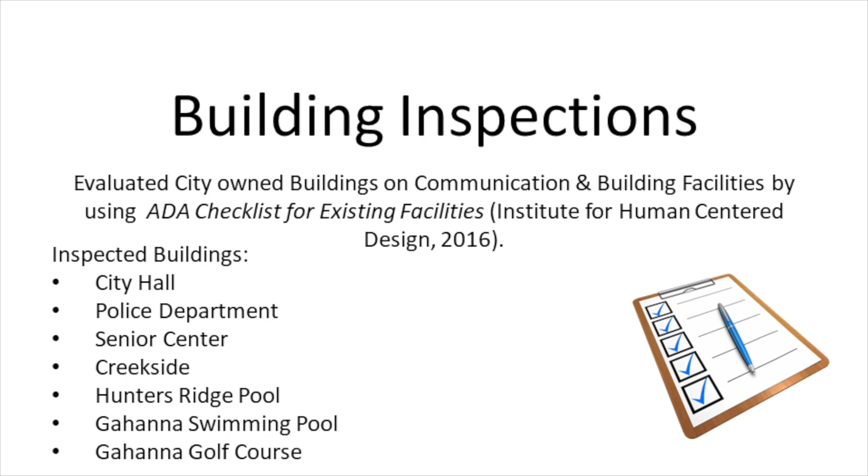In terms of communication issues, the most common things we discovered were either non-compliant sign heights on ADA parking spaces, or just the lack of signs at accessible entrances to buildings. We also noted that some signs within the facilities did not have braille.

The building inspections uncovered common issues, including inaccessible doorways and non-compliant restrooms—those with stall sizes or door locks that are inaccessible—and also non-compliant sinks, situations where an individual with a wheelchair may not be able to wheel up right next to the sink or air dryer. All of these issues within the buildings were documented and included in the ADA transition plan.

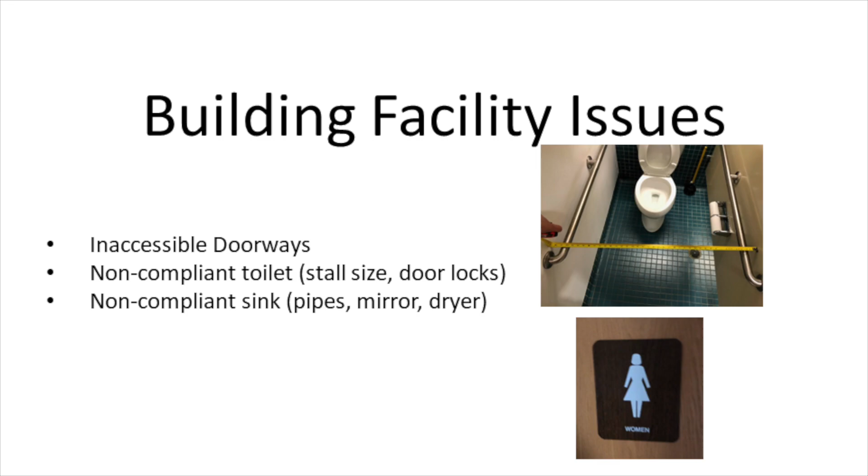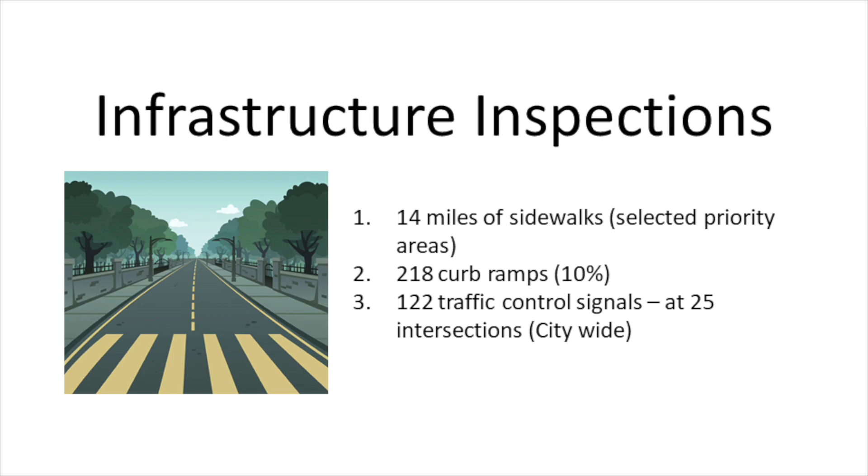Infrastructure inspections included 14 miles of sidewalks, 218 curb ramps, and 122 traffic control signals throughout the city.

Sidewalk inspections revealed several sections of sidewalk with settled panels, and ones with raised lips where tree roots have caused them to rise up from adjacent panels. Some sidewalks didn't have sufficient passing space. All these items were documented, and cost estimates were prepared to remedy these issues and included in the implementation plan of the ADA transition plan.

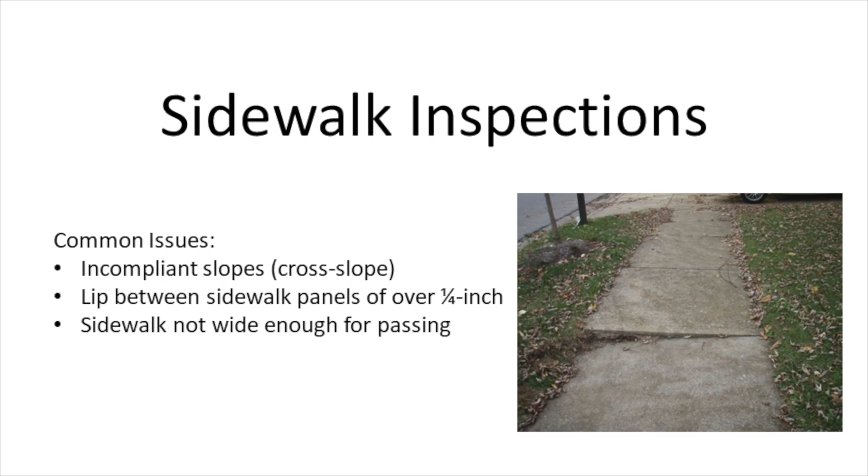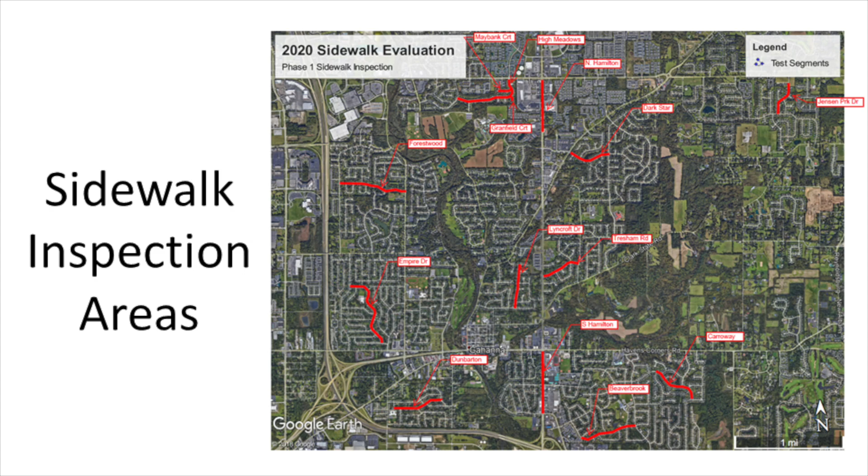Sidewalk inspection areas were identified by the city, and EMH&T personnel conducted very detailed and thorough inspections of those areas to identify all the deficiencies noted.

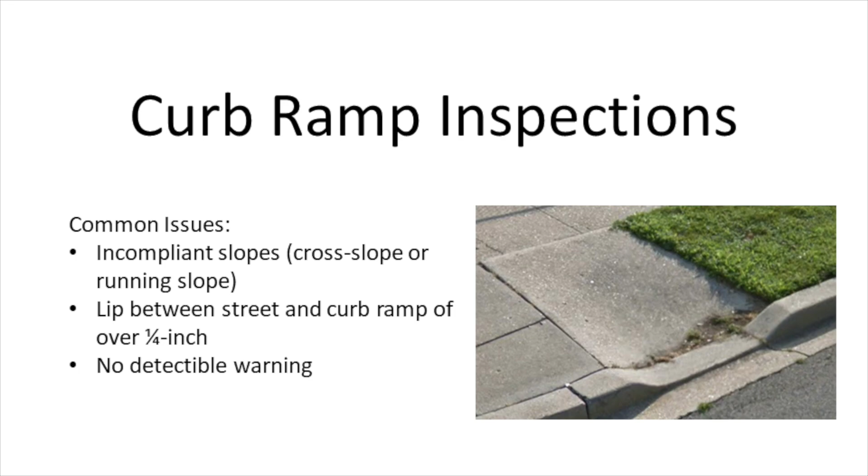ADA compliant curb ramps are an essential component at every intersection within the city. Over the years, curb ramp standards have changed significantly. As we inspected the curb ramps, we noted several things, including lack of detectable warning systems, non-compliant running slopes or cross slopes, or settled panels where sections have settled away from the adjacent sidewalk, creating a tripping hazard. All these items were summarized, and budgetary cost estimates were prepared to include them in the city's future capital improvement plans.

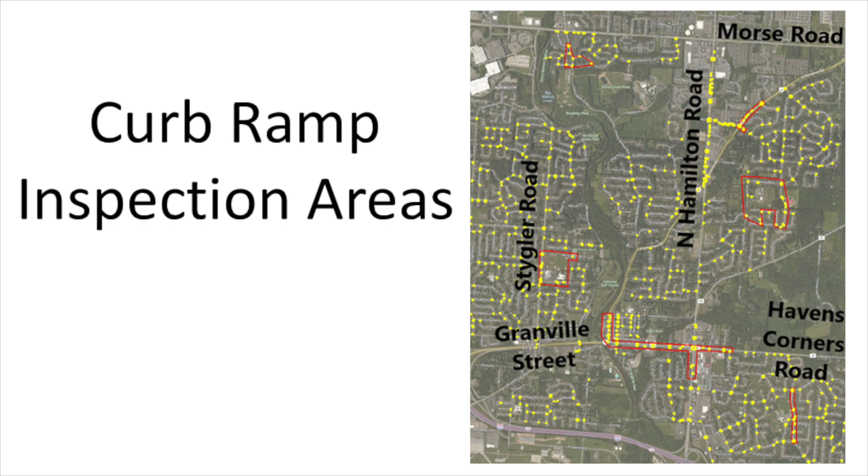Similar to curb ramps, standards for pedestrian push buttons at signalized intersections have changed over the years. Current recommendations include audible tones and braille on the buttons so that those with low vision can find them and know which direction they're heading. Several signalized intersections within the city predate these recommendations, and it would be recommended that they get updated

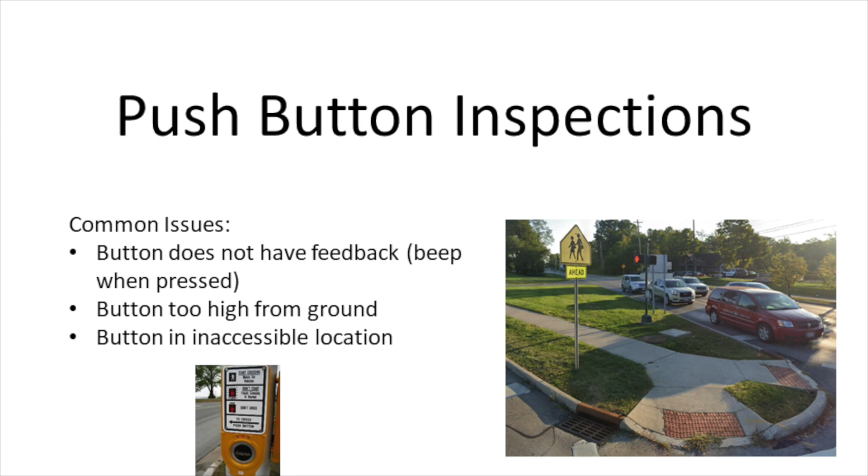with new buttons once a larger signal improvement or curb ramp improvement is being done at that particular intersection. In all, EMH&T spent several weeks in the field measuring and evaluating different facilities and infrastructure within the city to identify ADA issues and make the city aware of those through the development of the implementation plan located within the ADA transition plan. Now the city is working on budgeting those items for future years so that improvements can be made. I'd encourage everybody who has more interest to review the full plan on the city's website and provide feedback when available. As part of Gahanna's efforts to push forward our ADA transition plan in the last year and a half,

we've also been working on a proposed sidewalk maintenance program. There's a separate but related program initiative that's supposed to help the citizens of Gahanna bear the cost of sidewalk maintenance in their neighborhoods while also improving those sidewalks on a neighborhood scale. Unlike most home improvements, sidewalk maintenance is rooted in federal and state laws.

The Americans with Disabilities Act of 1990 established that accessible routes must be maintained in operable working condition. Those routes in Gahanna can be sidewalks, multi-use paths, or the distance from your parking lot to the front door of a building. Under Gahanna City Code, sidewalk maintenance is prescribed and required as part of a zoning obligation. In Ohio, state law establishes that property owners are the parties responsible for maintaining the sidewalk that abuts their property.

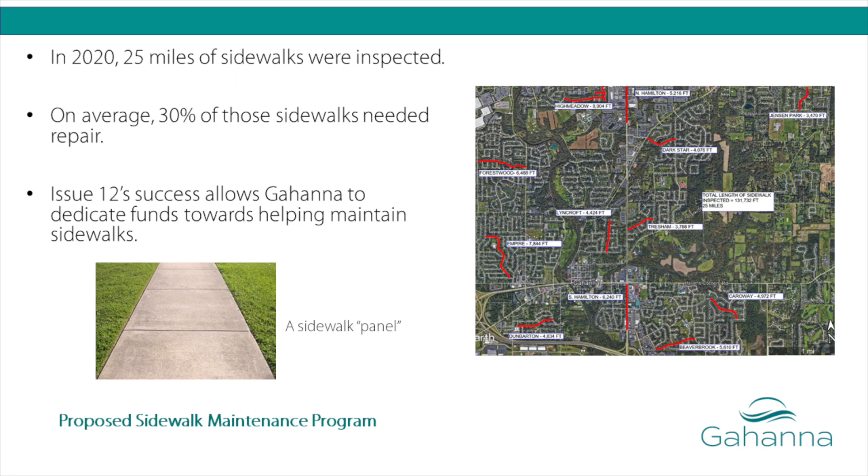Of those 25 miles of sidewalk, which comprise nearly 15,000 individual sidewalk panels, we found that 30% needed some form of repair. That could be replacement or leveling, but in general, maintenance of a sidewalk panel can be between $100 and $300 per panel. And if you happen to own a home that has a large amount of sidewalk, that can be a substantial repair cost.

The success of Issue 12 allows Gahanna to offer a program that can dedicate funds towards helping maintain those sidewalks. We hope to draft this program and have it before council as a final presentation in the coming months and kick it off in 2021. As a broad overview, the program looks to see all sidewalks maintained within 15 years across the city. It will be active in all wards of the city at any given time.

It will follow past street maintenance programs. So in areas where the city has invested in the streets in your community, you can see that the sidewalk program will come in years afterwards and look to maintain those sidewalks as well, so that we have a comprehensive network of maintained streets, crosswalks, curb ramps, and sidewalks.

If your property is part of a program area in Gahanna, you can see the following steps will take place. We, the city, will inspect all of the sidewalks. We will notify homeowners if we discover any maintenance needs on those sidewalks. And from that point, you'll have two options: you can opt in to the city's program, or you can opt out of the program.

If you opt in, the city of Gahanna will contract for those sidewalk repairs in a large capital project. We'll bid it publicly, seek a qualified contractor to do the work, and from the volume of sidewalk repairs, we expect to get very competitive pricing. We will then oversee, through our engineering staff, the work being performed to make sure it's quality. And at the end, Gahanna pays that contractor.

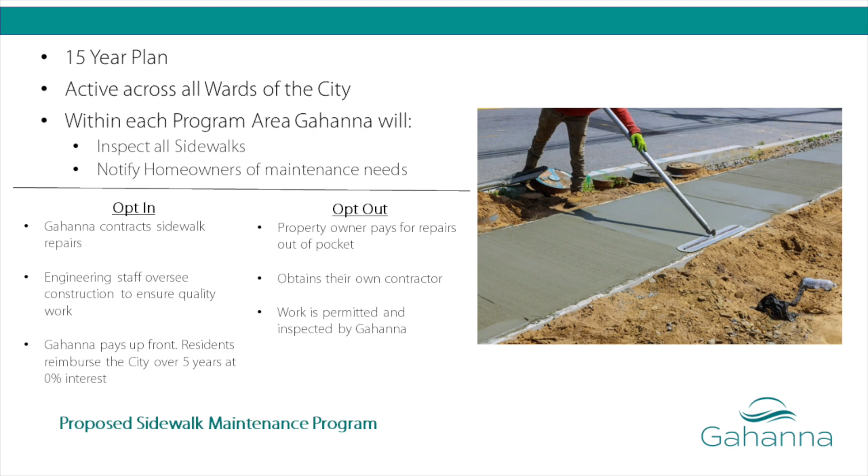You can see more of this program as it's presented to council in the coming months, and we welcome any feedback at that time. If you have any feedback on either the ADA transition plan or the proposed sidewalk maintenance program at this time, we ask that you please submit it through our website. There's links to an email address, ada@gahanna.gov. We're hoping to incorporate this feedback and make any changes to the proposed program before we roll it out in final form. But we look forward to presenting this option to the residents of the city so that we can seek these sidewalk repairs and help improve our pedestrian connections through our neighborhoods.